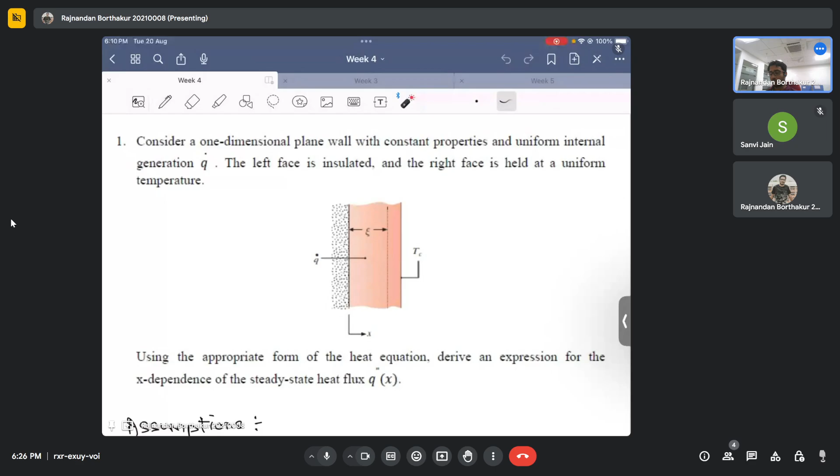In the first problem, we were asked about a body where one face was insulated and the other end had a prescribed temperature. There was uniform heat generation taking place inside the body, and we were asked to find the expression for the heat flux as a function of the spatial coordinate, keeping in mind it's a 1D heat transfer problem.

We solved that using the heat diffusion equation, and concluded by using the necessary boundary condition that our heat flux is proportional to x. This is indeed the case because when we have heat generation, as you derived in your lecture classes, the temperature profile is parabolic in nature, provided the heat transfer is one dimensional and heat generation is uniform throughout.

In that context, we saw that the temperature profile is parabolic, which means the flux, which is nothing but the gradient of temperature, has to be linear in x. So this is something that we saw.

In the second problem, this was a much more involved problem where we basically found out several things related to heat generation. The temperature profile was given to us, and we were asked to sketch the temperature profile, evaluate the heat generation rate, the fluxes, and finally, as homework, evaluate the heat transfer coefficient associated with these fluxes.

The important information that can be extracted from this problem is that although there was uniform heat generation taking place inside the slab, and the temperature profile was parabolic, we saw that due to the difference in the values of the heat transfer coefficient, which we didn't know a priori, the fluxes at these faces were not equal.

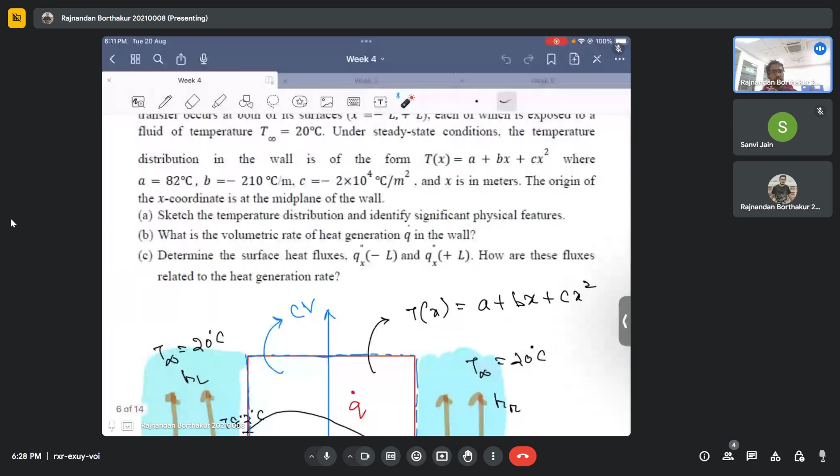This was contrary to a problem we solved in the first class, where if there is uniform heat generation inside a slab, and the ambient fluid had the same temperature and the same heat transfer coefficient, then the temperature profile was symmetric about the mean line at x equal to 0. However, in this case, since the fluxes at these faces were not equal, this means the rate of heat dissipation from the body to the fluid at the right face and at the left face won't be the same.

This is attributed to the fact that the heat transfer coefficient of these two faces are not the same. So this was basically the qualitative reason why the temperature profile is not symmetric.

However, as part of your homework, I asked you to evaluate the heat transfer coefficient. So can you kindly just give me a hint? How do we now evaluate this heat transfer coefficient, provided what did we know? We know that the fluxes from these faces we have evaluated. So can you tell me quickly how do we evaluate the heat transfer coefficient? Just a hint, it will be a good recapitulation also.

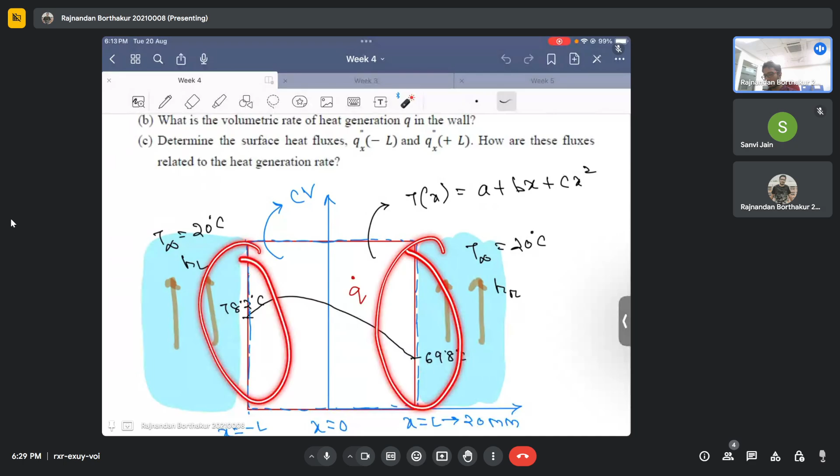What do we need to use in order to evaluate the heat transfer coefficient here for these faces? Yes, can you give me a hint? Or if you guys have evaluated it at your end, you can tell me the answer, or else I'll show you how we evaluate the heat transfer coefficient.

So basically, it's very simple. We need to use the continuity of fluxes at the interfaces, which I have repeatedly said. At the interfaces, whatever flux is coming from this slab to this interface should be dissipated to the surrounding fluid, which means I can write that at the right interface.

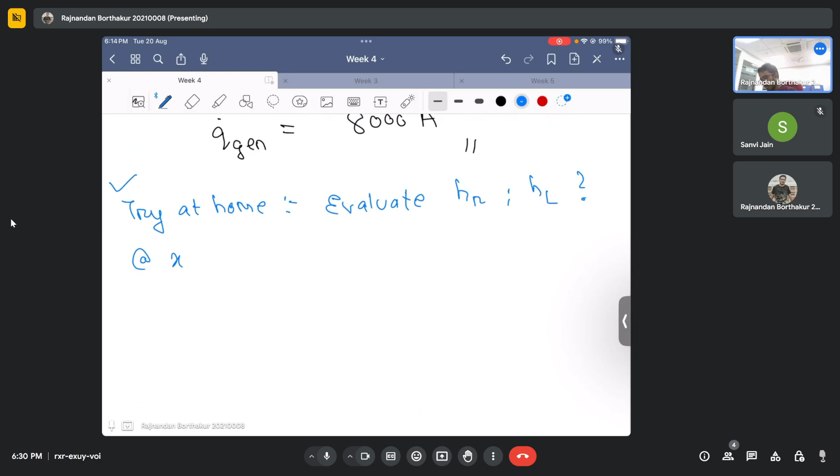So at x equal to L, what I can write is minus k of the slab times dT by dx at x equal to L is basically equal to what? Can you tell me what this is equal to? I hope this is not that tough, right?

We just need to balance fluxes. The flux coming out from the slab to the interface needs to be dissipated, because interfaces cannot store energy, at least in this context. So this should be equal to the convection flux, right?

So the convection flux would be the heat transfer coefficient towards the right times the temperature at x equal to L minus T infinity. Now everything is known to you, right? This flux we have already evaluated because we know the temperature gradient, so you can evaluate this flux.

In fact, we have evaluated that this flux at x equal to L is basically 5050. And T at x equal to L is also something we have evaluated in this problem.

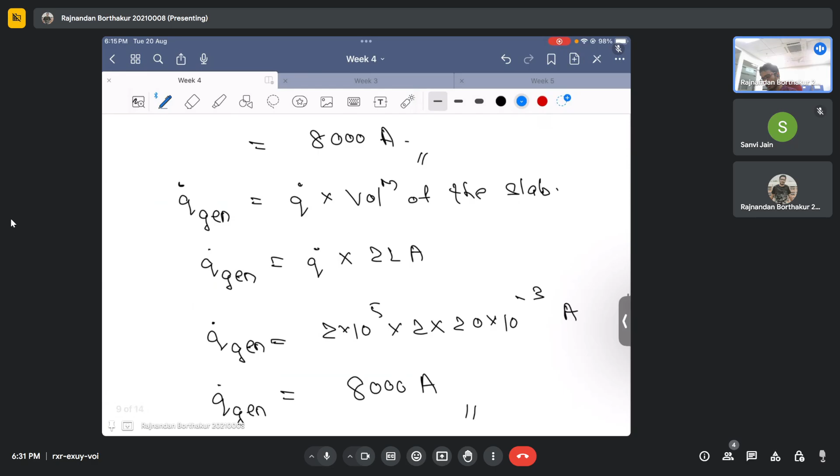So what was T at x equal to L? T at x equal to L is 69.8 degrees Celsius, minus T infinity which is 20 degrees Celsius. So this is basically minus 20.

Which means from here you can nicely evaluate the heat transfer coefficient h_R as just 5050 divided by 69.8 minus 20. Just do this math on your own and you will get the heat transfer coefficient having the unit watt per meter square Kelvin.

Similarly, using the same principle, exactly the same principle, you need to apply this for x equal to minus L.

When you write this for x equal to minus L, this becomes minus k dt by dx at x equal to minus L, which equals your heat transfer coefficient of the left times your temperature at x equal to minus L minus T infinity. If you follow the same principle as before, you can easily evaluate the heat transfer coefficient HL for the left face. Just do this math and you will get some value with units watt per meter square Kelvin.

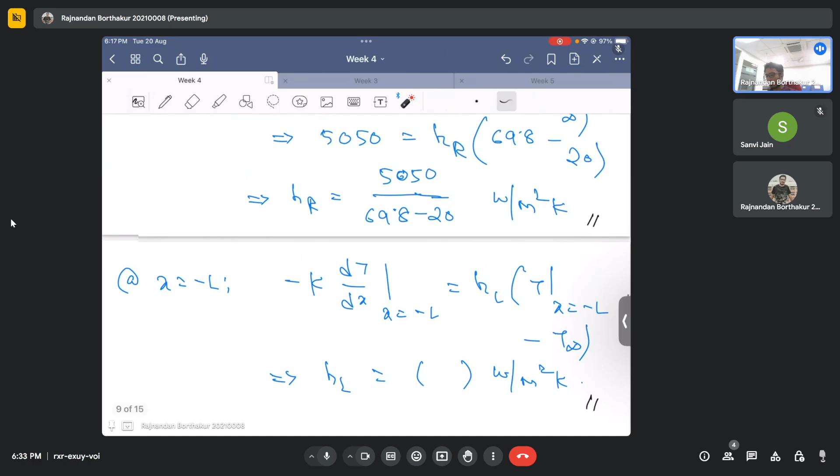This was something we saw, and I asked you to do this as part of your homework, or you can do it at your end at any time. I hope you have at least tried to do it, or have evaluated it. This will help and assist you in thinking how to solve such kinds of problems when you encounter them, and you should try to do it whenever you get a chance to solve this kind of problem.

We ended this problem by solving another important problem involving heat generation in a cylindrical pipe having an inner radius r1 and an outer radius r2, given that the cylinder is insulated at its outer radius. This was again related to heat generation, but this time in a cylindrical coordinate system. The idea was to solve the heat diffusion equation in cylindrical coordinates to get the temperature profile, and then use the boundary conditions to derive the constants C1 and C2. The first boundary condition was the insulation condition, meaning the flux at R equal to R2 is equal to zero, which is the physical manifestation of the cylinder being insulated at its surface.

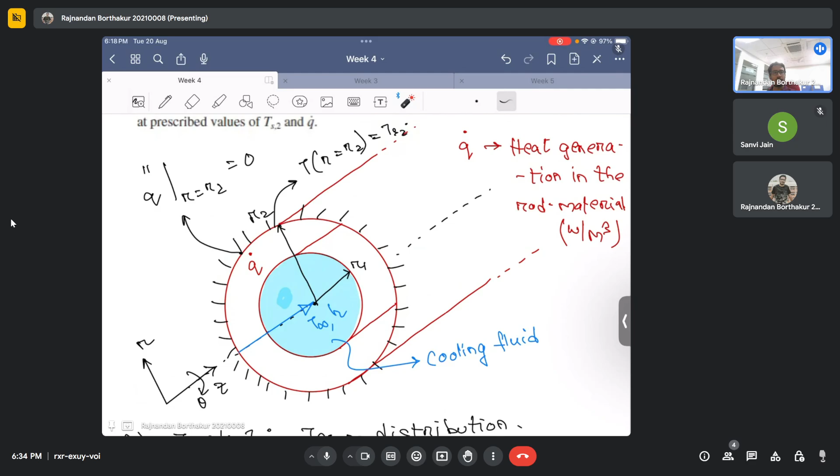To evaluate the second boundary condition, they said that this surface was at a prescribed temperature Ts2. From that we evaluated the unknown constants C1 and C2. Thereafter, they also asked us to find the heat removal rate.

For that, it is simple because the cylinder for which we are solving the heat diffusion equation is being convectively cooled by a fluid flowing through its annulus. They asked us, if the fluid is flowing through the annulus, what is the heat removal rate that the fluid is extracting from the cylinder. For that, it was very simple: we used Fourier's law and applied it at the surface R equal to R1, and this is precisely the heat removal rate from the cylinder.

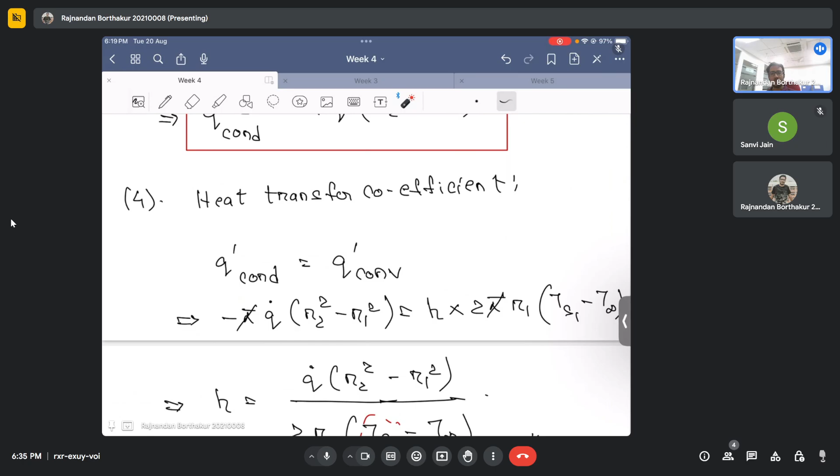We were then asked to evaluate the heat transfer coefficient, for which we did exactly what we did some time ago: we equated the conduction flux to the convection flux. This is something we did in the last week.

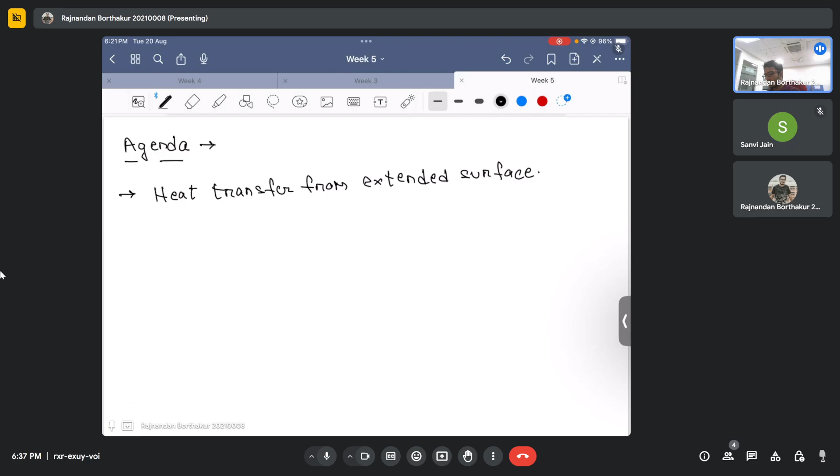That is basically understanding how heat transfer takes place from extended surfaces. So I'll begin, and I hope you guys will answer some of the questions. I'll start by asking a question here, and then proceed with what needs to be done.

I hope assignment 5, which is related to extended surfaces, has been released, and I hope you got a chance to watch the week 5 lectures, which are again related to extended surfaces. It starts off with understanding the heat diffusion equation that we write for an extended surface.

It starts with the fact that you take a long surface, a long fin, then derive what the temperature profile would look like. For instance, you solve the heat diffusion equation there.

You make a transformation, saying theta is basically T minus Tb, where Tb is the base temperature of the fin that you guys have seen. Then you solve an equation like this: d2theta by dx2 minus m square theta equals to 0. This is solved subject to the boundary conditions.

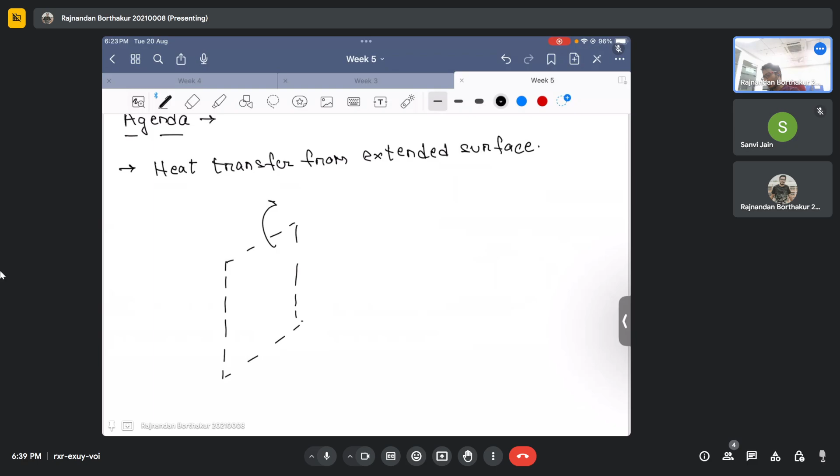Now for the boundary conditions: let's say when I'm taking a fin, this might be my base surface, and it's called the base surface because it remains at some temperature Tb. This is the surface from which we are trying to extract heat, such that the rate of heat transfer is enhanced.

Let's say we are attaching a fin here, and my fin is cylindrical in nature, so it becomes something like this. Then, this boundary condition on the left always remains the same.

We say that the temperature here - remember the theta transformation variable is nothing but the temperature of the fin at any axial location minus the base temperature Tb, because this surface is at a base temperature known as Tb. Theta is the temperature at any axial location of the fin minus the base temperature.

So remember, when you guys solve the governing equation, which looks something like d2theta by dx2 minus m square theta equals to 0 - can you tell me what was the value of m?

M was something related to the physical properties and the dimension of the fin. Can you remember what is m? Can you quickly try to remember and tell me?

Yes, exactly, you were right, Sanvi - it's p. Actually what you wrote is m square. M is basically the square root of ph by k times ac. So it is the square root of that. Thank you, Sanvi, for the answer.

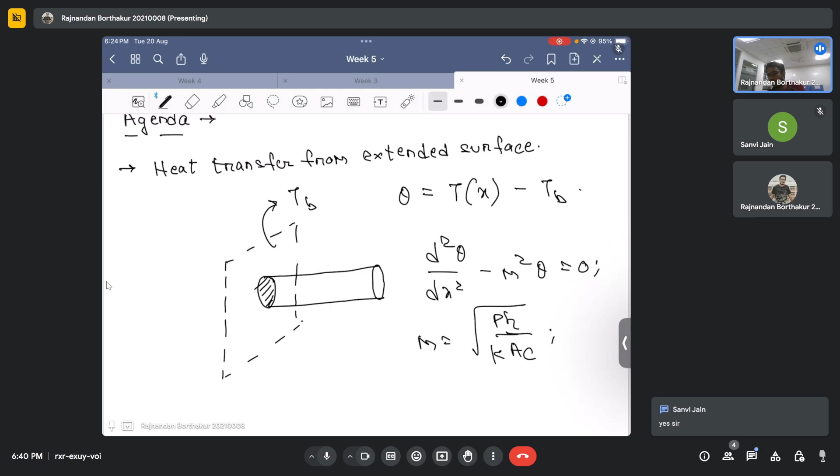So what I was saying is that in order to solve this equation - a second order equation - you require two boundary conditions, as you guys have seen. The left boundary condition always used to remain the same.

This is nothing but theta - can you tell me what was the left boundary condition, what is theta at x equal to 0, if you remember? This was just the base temperature, theta b, right? So theta at x equal to 0 is nothing but the base temperature, theta b.

The only difference that came into the picture was the boundary condition we used to write at the right surface. For instance, if I have a long fin - the very first case you solved was for a long fin, meaning the length of the fin is very long with respect to its cross section - in that context, we use different boundary conditions. The second case was the boundary condition known as the insulated tip boundary condition.

In the first case, we had a long fin, where the fin length was sufficiently long with respect to its dimension. In the second case, the insulated tip boundary condition, the length of the fin is not that long, but the tip is insulated, meaning the flux at x equal to L is equal to 0.

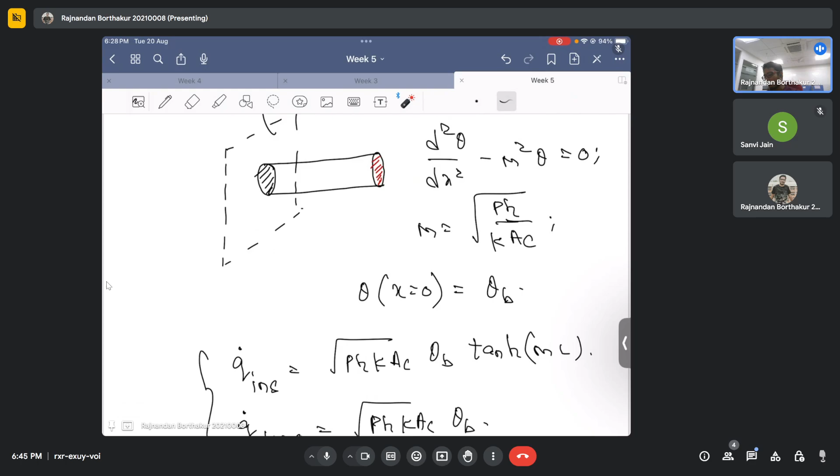The fourth boundary condition is that instead of being convectively cooled, they have prescribed the temperature here - on this surface the temperature is known. For instance, if my theta is basically theta B at the base, they have said that on this surface, let's say my theta is some theta R, which is known a priori.

Depending on this, the boundary conditions of the fin varied, and the expressions for the rate of heat transfer, fin effectiveness, and fin efficiency also varied. But the bottom line is that irrespective of whatever boundary condition you use, we just need to solve the heat diffusion equation - this equation is universal and valid at each and every point of the fin; it's just the boundary condition that differs. Quickly, I would like to reiterate two more things and then we will start solving problems.

Can you now tell me, based on this, we define two important fin characteristics. One is known as fin effectiveness. Can you quickly tell me what is fin effectiveness? This is a direct question from your assignment - you were asked to answer what is fin effectiveness.

Try to understand why do we basically define effectiveness. When we define effectiveness, we are kind of defining it with respect to a scenario when that particular thing is not there - that's the hint to the answer of fin effectiveness. So now can you tell me what is fin effectiveness?

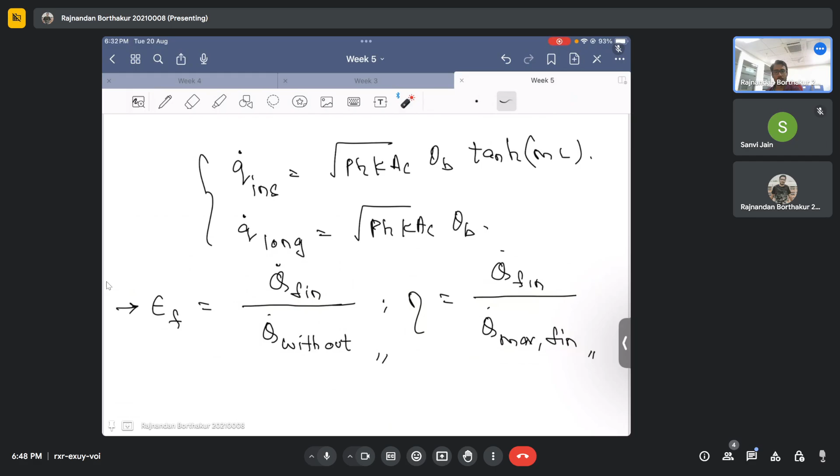Okay, now try to understand that not always will adding a fin enhance the heat transfer. For instance, consider a scenario when there was no fin. If there was no fin, this entire surface would have just convectively released the heat to its surrounding.

Now what we are trying to do is add an additional material. This material is very thin, so the perimeter to surface area ratio is very high, such that this material would enhance the rate of heat transfer, but the bottom line is that this material would also add additional conduction resistance to its path.

So it's not that readily you just stick a material and that would just increase your rate of heat transfer, because while this material is trying to release the heat to its surrounding, it itself will pose a conduction resistance to its path.

So the objective is that we try to minimize this additional conduction resistance of the fin such that this material will enhance the rate of heat transfer with respect to the case when this fin was not present.

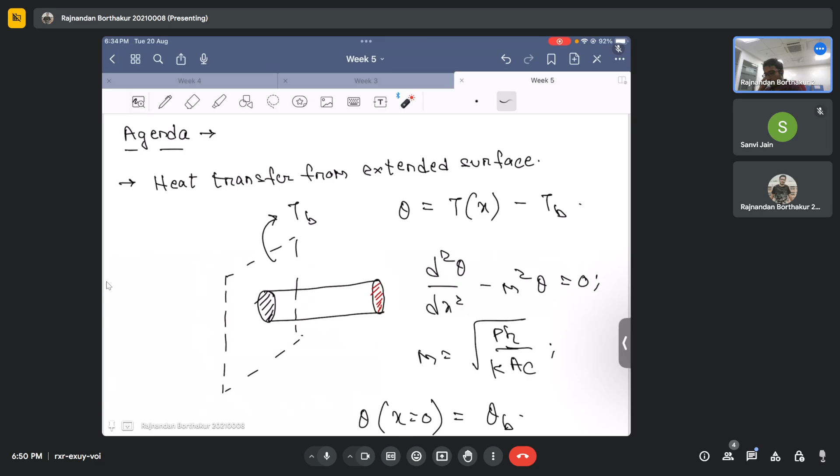Okay, so based on these theories that we see, we will solve our first problem. It's not this problem, so this is our first problem that we'll solve. The earlier problem will come at a later stage.

So it says that establish a relationship between fin effectiveness and fin efficiency. Okay, and while doing so, we will look into some important conclusions that I have just said.

So for instance, as you have correctly pointed out, that your fin effectiveness is basically rate of heat transfer with fin to the rate of heat transfer without fin.

Now you need to tell me that if I now have a base surface, and this base surface has got an area AB, which is basically the area of the base surface, okay, I'll for the time being just neglect this AB. I mean, we'll see this, but for the time being, just make it clear. Just one second.

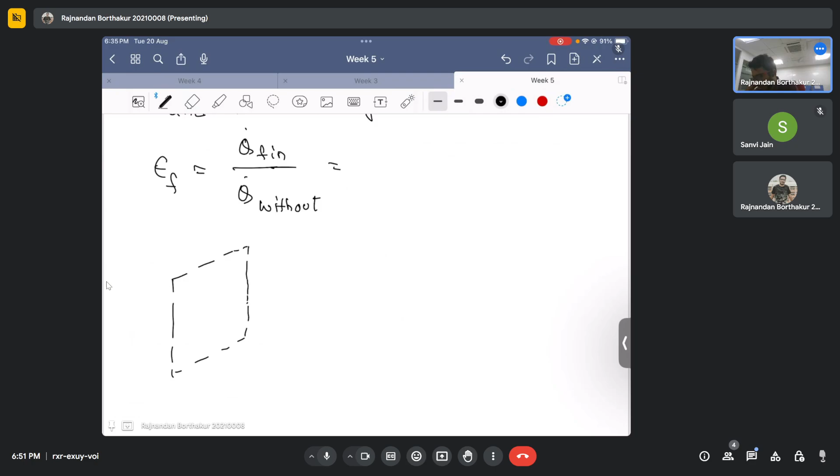Now let's say we have a base surface, basically this. This surface is known as the base surface, and it has an area AB, which means this entire surface has an area AB. Let's consider the area of the base surface to be AB.

In this context, if I now attach a fin, and for the time being let's say it's a long fin to simplify our calculation, this is the fin. The cross-sectional area of this fin we'll denote as AC, so AC is the cross-sectional area of the fin.

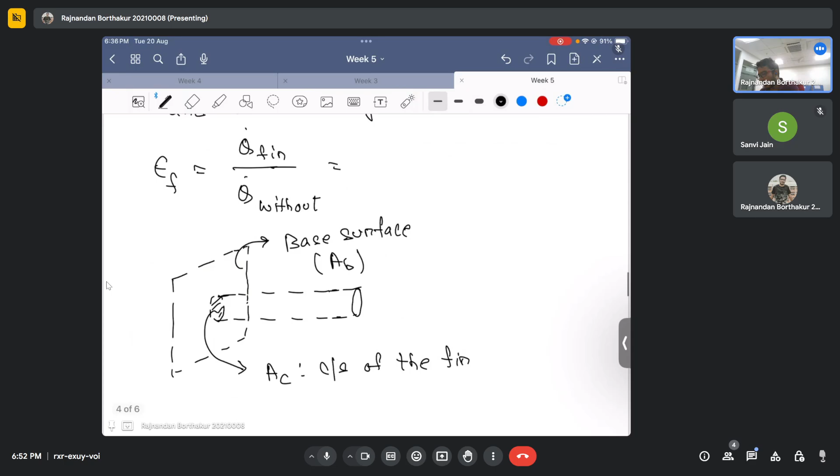In this context, can you tell me what will be Q dot without, the rate of heat transfer that will take place from this surface if there was no fin? I'll give you one more information: the heat transfer coefficient is H, and this base temperature we'll consider as theta B. Can you tell me, based on this, what is the rate of heat transfer without fin, in terms of H, theta B, and this area?

So the objective is to relate the fin effectiveness and fin efficiency and see how these two relate, we'll try to establish a relationship between the fin effectiveness and fin efficiency. So can you now tell me what will be the rate of heat transfer without fin?

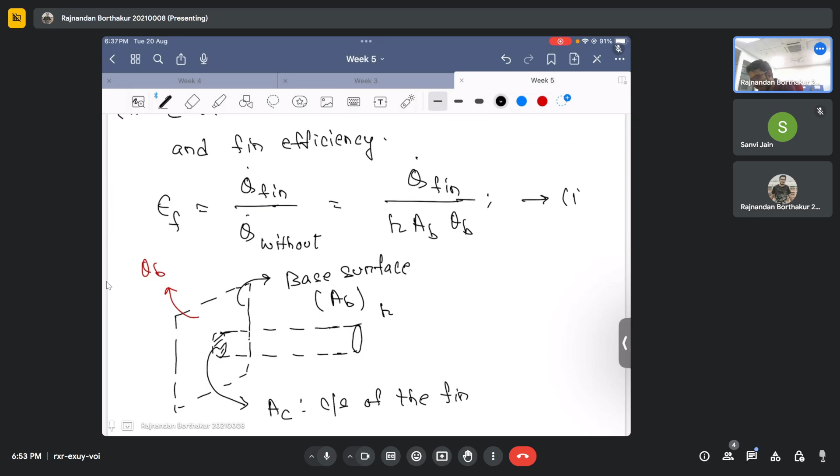We have H A B delta T, where delta T means theta B, that's what I think you meant. Exactly. So the rate of heat transfer without fin, as you rightly pointed out, is the heat transfer coefficient, that is basically Newton's law of cooling, as we have seen multiple times. So it's H times area of the base times theta B, where theta B is basically the base temperature, which we'll denote as theta base. So this is something we get from the definition of fin effectiveness.

Now, can you tell me what is the efficiency? Efficiency is nothing but the rate of heat transfer from the fin to the maximum rate of heat transfer from the fin. Here is my question: we will keep the numerator as it is, it's just going to be q dot fin. That's because we have q dot fin here also and here also, so we will not substitute the value there because it will just cancel out, or when establishing a relation, this factor won't be there since it appears in two forms.

But now can you tell me in what condition the fin would dissipate its maximum heat? Can you tell me the condition under which there will be maximum rate of heat transfer from the fin? Can you think of it?

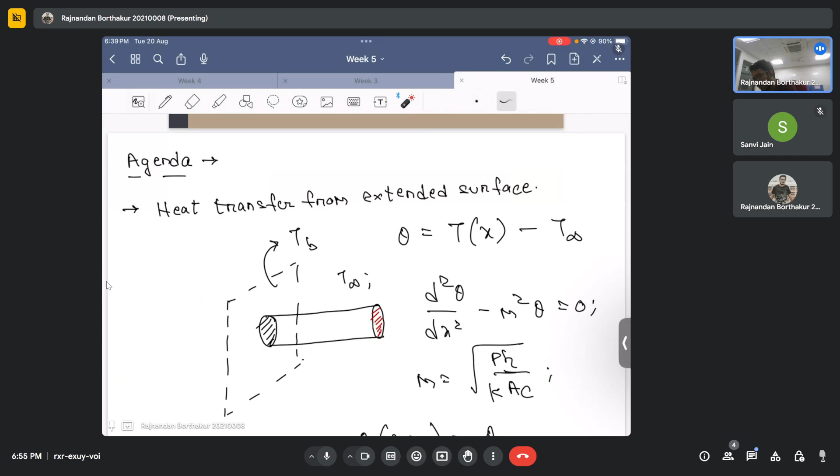You correctly pointed out that the rate of heat transfer without the fin is H AB theta B, the heat transfer coefficient times the area of the base multiplied by the temperature difference of the base and the ambient. This theta B is going to be TB minus T infinity. By the way, I made a slight mistake here, from my end. Theta was not this thing; theta was basically the temperature of the fin at any point minus the ambient temperature. I wrongly wrote it as theta B, this will be T infinity. Sorry for that. But anyways, can you now tell me under what condition the fin would dissipate maximum heat?

Can you tell me? Can you give it a try?

So what Sanvi says is that at x equal to 0, temperature equals theta b. That is true, Sanvi, that at x equal to 0 the fin temperature would be theta b. But my question is, that is for a practical fin. For a practical fin, the temperature here would be theta b, and when you move in this direction, the temperature would ideally decrease. But in an ideal scenario, for the fin to dissipate its maximum heat, the entire fin has to be at the base temperature. What I mean is that when you move from here to here, if my fin temperature is equal to the base temperature, in that scenario your fin can dissipate the maximum heat. And this is kind of a limit.

Just like the Carnot cycle's Carnot efficiency is a limit, this Qmax maximum is a limit to the maximum heat transfer that the fin can dissipate. So I'll write it here. So Qmax is basically the maximum heat the fin can dissipate.

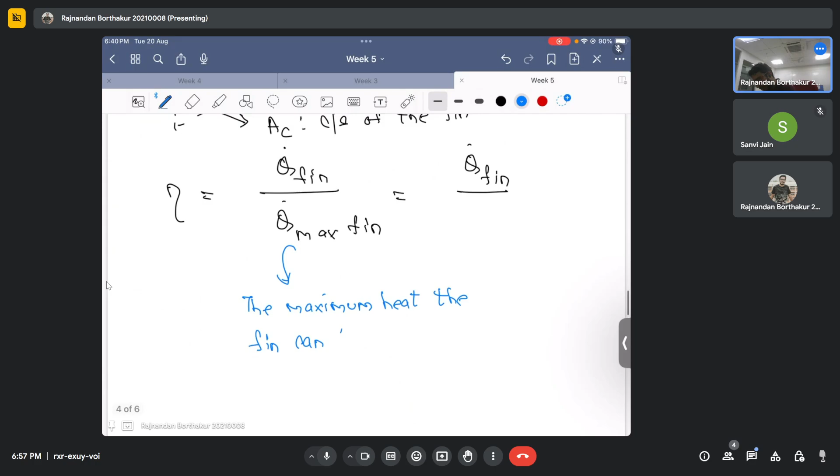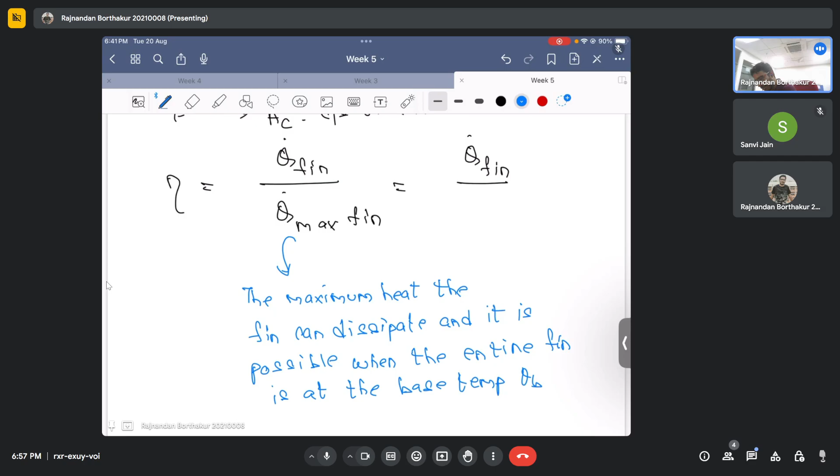And it is possible when the entire fin is at the base temperature theta b, meaning that I hope you have understood this.

This means that whether I am in this cross section or in this cross section or in this cross section, throughout this entire cross section the fin temperature is just the same and it is equal to the base temperature. The physical insight or meaning of this fact is that the conduction resistance within the fin is negligible. In that context, the entire surface of the fin would be equal to the base temperature theta b, and the only way the fin would dissipate heat is now by convection to its ambient.

For example, if I am in this cross section, my temperature would always be equal to theta b, and this would basically dissipate heat now to its ambient, and the mode of heat transfer is convection. In this scenario, the fin can dissipate the maximum heat. Is it so? Are you clear now? In what scenario can the fin dissipate maximum heat, and thus the definition of fin efficiency?

Can you give it with a yes or a no? Or do I need to explain it again? I mean, I'll be happy to do that. So, did you understand the scenario? When can the fin dissipate the maximum heat from its body? Okay, yeah, sure. Thank you very much.

Which means now, can you tell me what will be this expression of Qmax fin? So I have said the scenario when Qmax fin can occur, that is when the entire fin is at the base temperature. Now what will be this Qmax fin? So that also I have hinted.

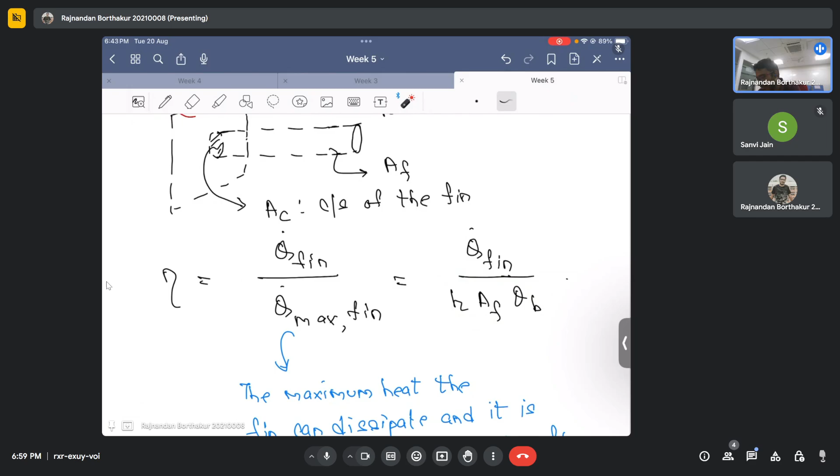That is obvious, right? Because the only way the fin can dissipate it to its ambient is by convection, since the entire fin has now got the same base temperature, which means by conduction it won't dissipate heat. We have now considered that there is very negligible conduction resistance, which means the only way this heat could go out from the fin is by convection to its ambient.

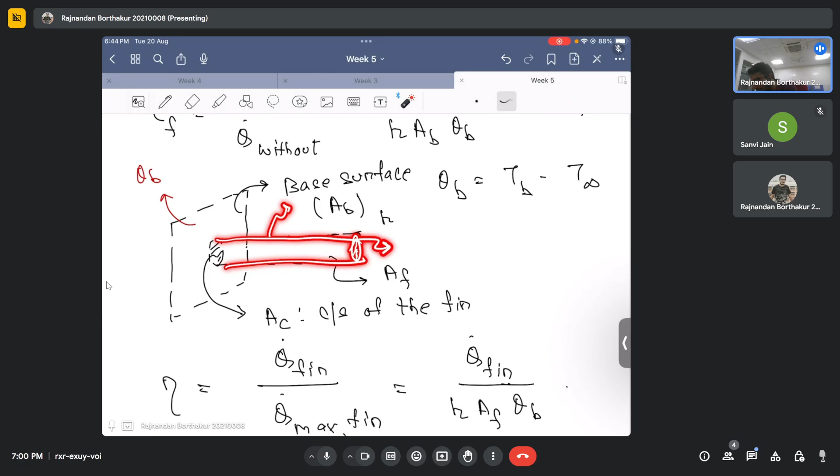And what is the heat transfer that takes place due to convection? It is the heat transfer coefficient times the area. Now the area becomes critical, because you need to consider the area of the fin. The area of the fin will encompass this surface area plus this cross sectional area, because these are the areas through which it will dissipate heat to the surrounding. That's why I have written it as AF. You can pinpointedly calculate AF depending on the geometry of the fin.

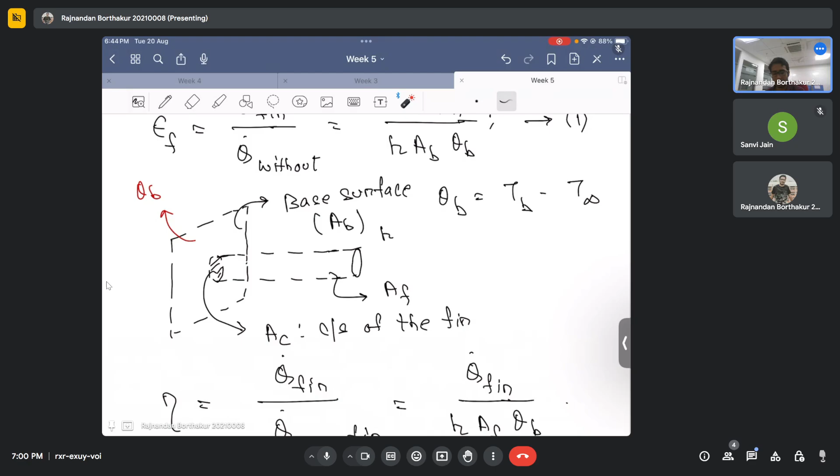And of course this is theta b, because I have now said that the entire surface of the fin is at the base temperature, which means that the temperature difference the fin would see when it dissipates heat through convection is Tb minus T infinity, and that's why we have written it as theta b, which is basically what I was talking about. So this is the definition of your fin efficiency.

These two parameters are very important, and frequently you will see the usefulness of these two parameters. Now the idea is to essentially relate this fin effectiveness and fin efficiency, and what we will now do is try to calculate, from the definition of efficiency, q dot fin. So q dot fin becomes, so from equation 2...

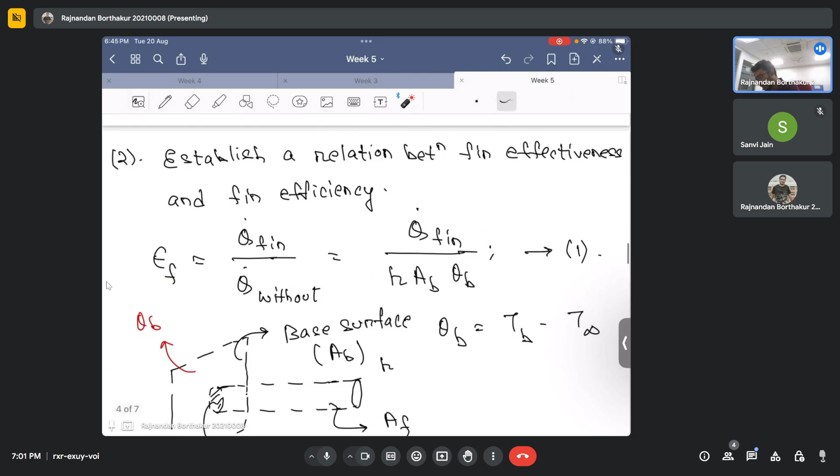So from equation 2, your q dot fin becomes the efficiency multiplied by Qmax, and this Qmax from the fin we have calculated as h times area of the fin times theta b. And what we will now do is substitute this q dot fin into this definition of effectiveness, because we have q dot fin here.

Okay, so I hope the drill is clear. So what we will do is we'll substitute this, substitute in 1. So what was 1? Our 1 was fin effectiveness was q dot fin, divided by the rate of heat transfer when there was no fin, which basically was h a b theta b.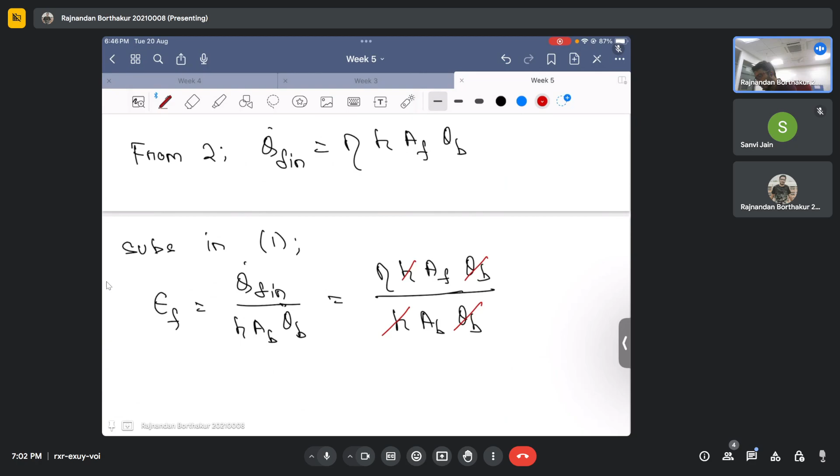And now we will substitute the value of q dot fin from the definition of effectiveness, which becomes efficiency times h a f theta b by h a b theta b. Some parameters would cancel out, your theta b and theta b would cancel out, h and h would cancel out. And then your effectiveness becomes basically your efficiency into area of the fin by area of the base. This is typically the relationship between your fin effectiveness and fin efficiency. I hope you are clear with this one.

Okay. All right. This is what the question has asked us to do. We'll do one more thing, that we will derive the condition under which the use of fin is essential. And for that we will use the definition of fin effectiveness.

So remember, what we said is that your fin effectiveness is basically q dot fin by HAB theta b.

Actually, I think I made a mistake here. Can you tell me where did I make a mistake in effectiveness? So I made a mistake in effectiveness. Can you tell me where did I make a mistake here? I made a mistake here in defining something. Can you suggest where did I make a mistake? So I'll tell you, I made a mistake in effectiveness. There is something that is wrong in effectiveness.

See, when we were defining effectiveness, I said that it is the rate of heat transfer from the fin to the rate of heat transfer without fin. And then when I wrote q dot without fin, I wrote this area as AB. But this is wrong, right? Because the fin is responsible only for dissipating heat through this area. The rest it will anyway dissipate to its surrounding. Which means instead of this being AB, it should be AC. Are you clear why it is AC and not AB?

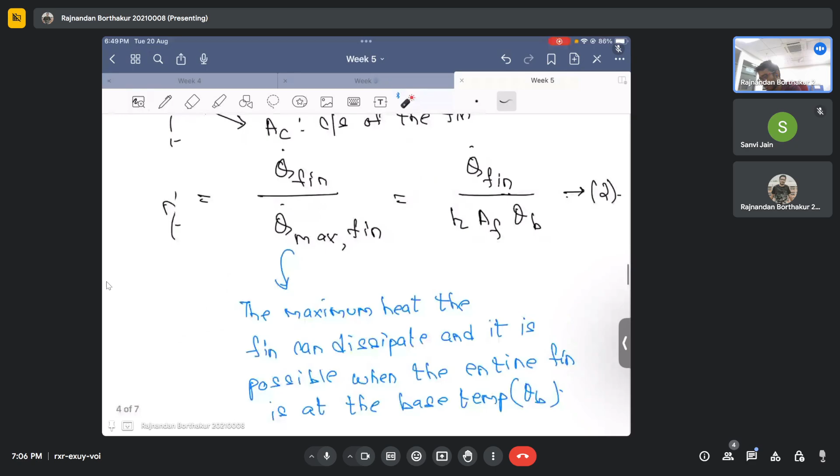Anyways, so this would be AB - sorry, this would be AC, and then this would be AC. So this was the mistake I was making. So your effectiveness is essentially efficiency times the area of the fin to the cross-sectional area, AC. And of course this has to be also AC.

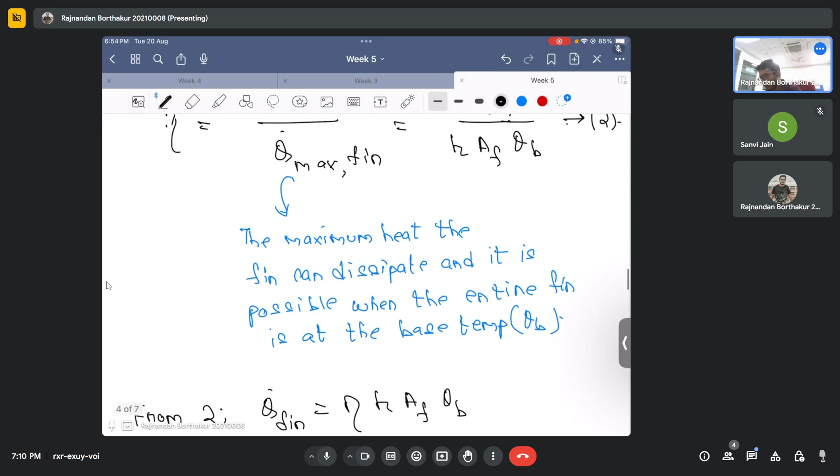I ask you again, I hope you have understood why you have used AC and not AB. Are you clear on this? Can you kindly give it a yes or a no? Because I was making a mistake, right? So did you understand why this is AC and not AB? Because AC, what is AC?

It's basically this cross section, okay, where the fin is attached, and AB is the area of the entire base surface. I'll repeat it again: it's not AB. That is typically because we are trying to compare the rate of heat transfer from an area when there was that fin with respect to the same area when there was no fin. So the area always needs to be the same. If we are using AC in trying to calculate the rate of heat transfer from the fin, then we should use the same AC in trying to calculate the rate of heat transfer when there was no fin. And that is typically the reason why this area is AC and not AB.

The remaining area, what is the remaining area? If AC is already accounted, the remaining area is the base area minus AC. This remaining area will anyway dissipate heat to its surrounding by convection, so we cannot count that area into the picture. We always need to count that particular area on which we are attaching the fin.

In the second scenario, we are removing the fin and then trying to calculate the rate of heat transfer from that area. Are you clear on this now? Can you give it a yes or a no? Yes. Thank you.

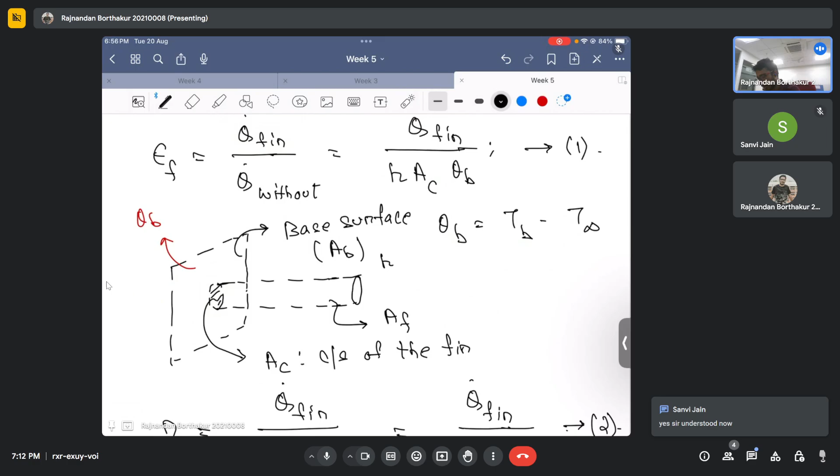Okay, so this was the first question that we solved. It was rather an easy question, but it was very insightful. And you will see multiple assignment questions related to the exercise that we did now.

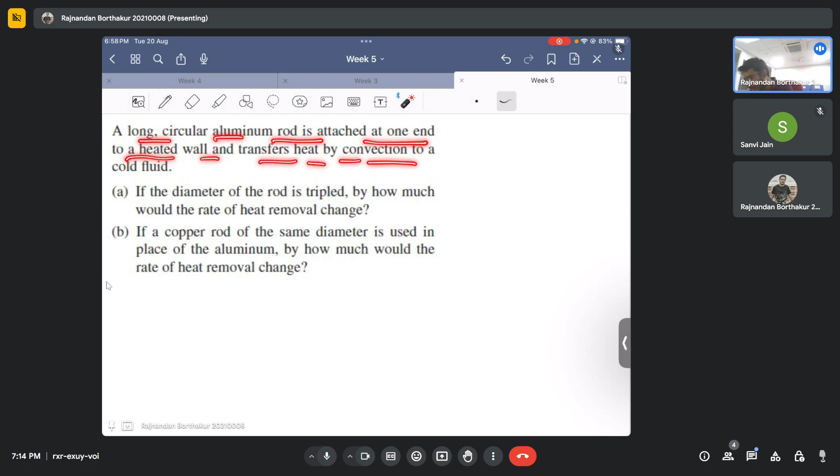It says that a long circular aluminum rod is attached at one end to a heated wall and transfers heat by convection to a cold fluid. This hints that the aluminum rod serves as a fin. Now, if the diameter of the rod is tripled, by how much would the rate of heat removal change? And in the second case, if a copper rod of the same diameter is used in place of aluminum, by how much would the rate of heat removal change?

Okay, so the question seems, from the question it seems that we have to use the concept of fins.

From the question, can you tell me which of the four boundary conditions that we first saw, and that you saw in this week's lecture series as well - the long tip, the insulated tip boundary condition, the convection or prescribed convection from the tip, and the prescribed temperature - out of these four, which one should be used to solve this problem?

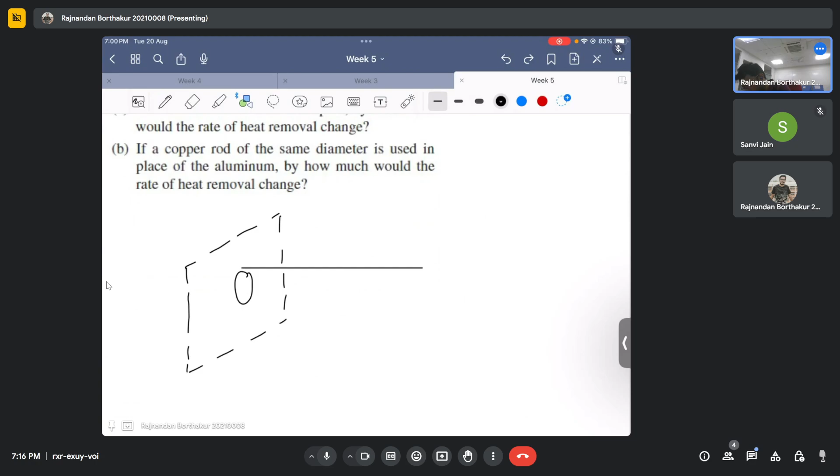First of all, you need to appreciate that this is a fin problem, because it says an aluminum rod is attached at one end to a heated wall, which means it's kind of like this: there is this heated wall, and then you are attaching an aluminum rod of some prescribed diameter.

And then this wall is heated. This means that the rod is now trying to increase the rate of heat transfer, and that's why it serves the purpose of a fin.

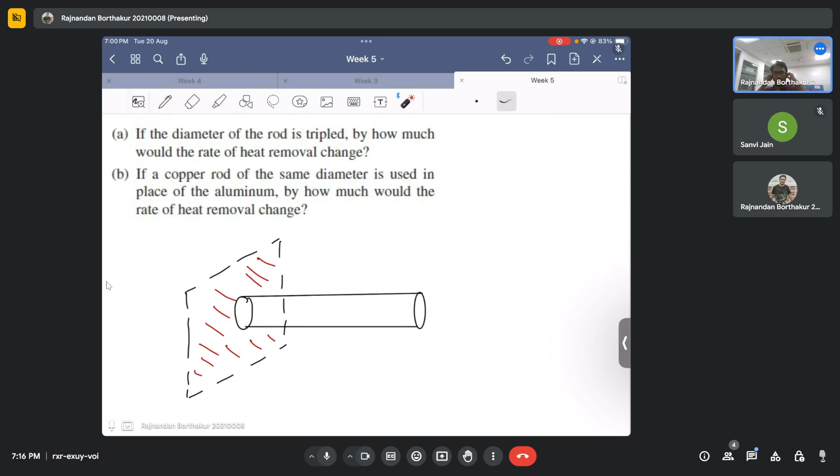The question is, if this is the case, and it says that it transfers heat by convection to a cold fluid - that is, it has a cold fluid here, which may be at temperature T infinity and a heat transfer coefficient H infinity, and it says that it is transferring heat to this cold fluid by convection - under this case, which boundary condition should we use?

We need to determine what is the rate of heat transfer, and the rate of heat transfer depends on the right boundary conditions that we use. For instance, for a long fin, the expression for rate of heat transfer is different. For the insulated tip boundary condition, the expression is of course different.

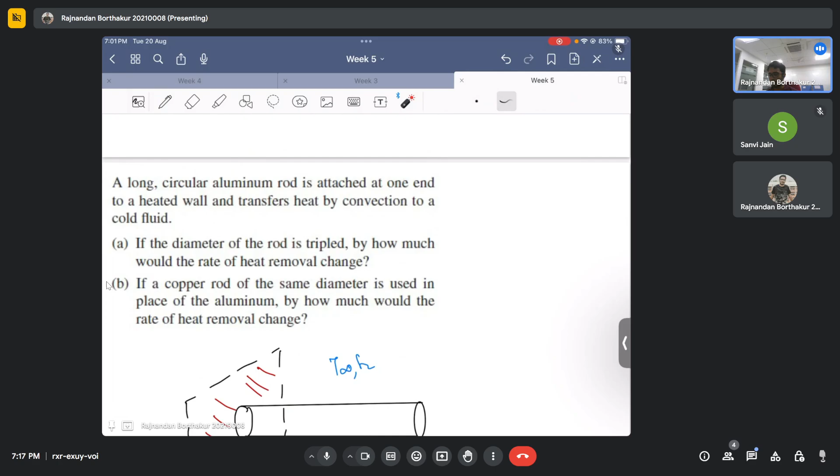So which boundary condition do you think we should use in this problem? Is it an insulated tip, or a long fin, or is it convectively cooled, that is, prescribed convection from the tip, or a prescribed temperature at the tip? Which one do you think we should use here? You should read the question for that. What do you think?

It's already given that a long circular aluminum rod is attached at one end to a heated wall. This means, from the problem itself, that the length of the rod is very much long, which means it will be okay for us to use the long fin assumption. I hope you are clear.

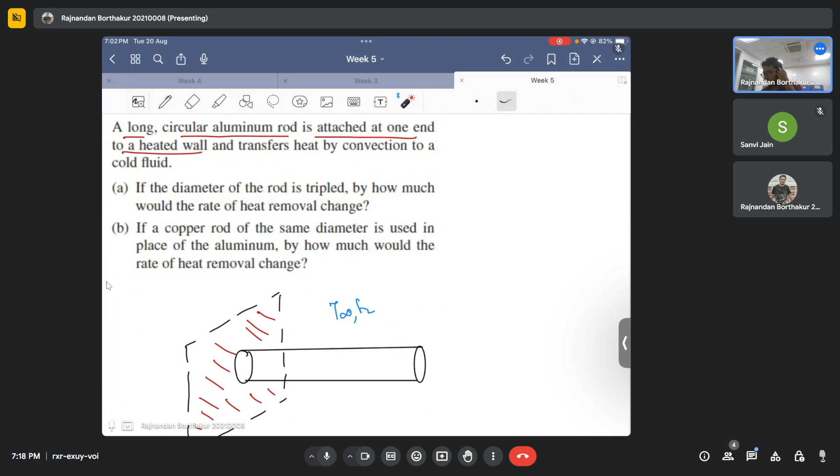So it just comes from the question only. The question says that the rod is long enough, which means that we can now use the long fin assumptions. In that context, the idea is using the long fin formulation.

Can you tell me what is the rate of heat transfer now, Q dot from the fin? See, because what they are asking us to compare is, if the diameter is tripled, how much would the rate of heat removal change? So for that, at least we must first calculate what is the rate of heat transfer, and then we will see how it depends on the diameter.

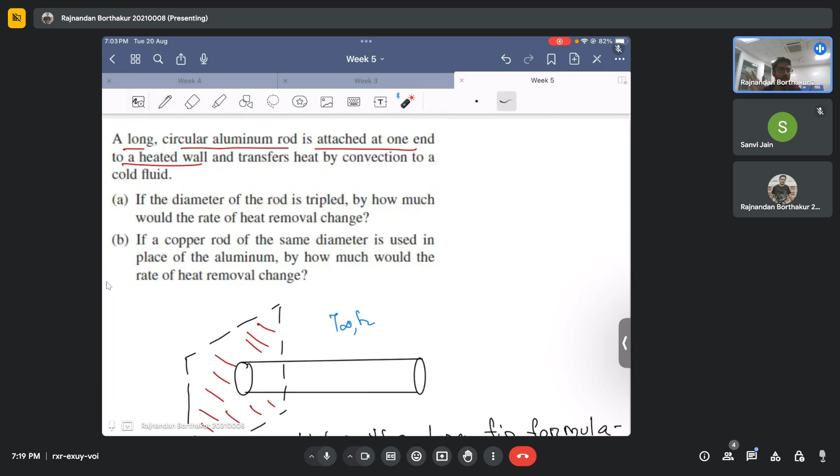Can you tell me, for a long fin, what is the rate of heat transfer? We just now saw it in the previous problem. What is Q dot F for a long fin? The long fin is the easiest one, right? It's not that difficult.

So Q dot F for a long fin, as we have seen, is nothing but under root of P H K AC theta B.

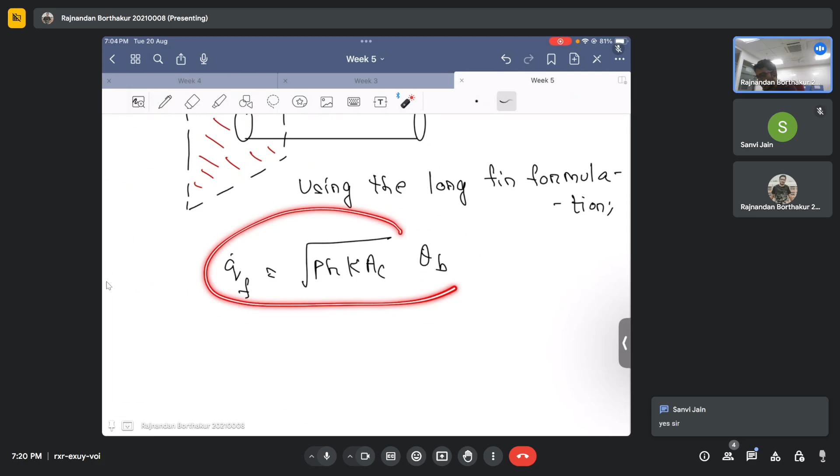Basically it's very simple. What you need to do is solve this for theta, using the boundary condition for a long fin, and you will get theta as a function of x. Now, in order to determine the rate of heat transfer, you just need to apply Fourier's law at this point.

Q dot is nothing but minus K times d theta by dx into AC. So once you calculate theta, just substitute it here, and you will get this expression - the idea behind getting under root of PHKAC theta B. I hope you have derived that, or at least gone through the steps involved in its derivation.

But on a broader perspective, that's the idea of how this is derived. Now let's see in which of these terms the effect of diameter is seen. So I can write it as Q dot fin - what would be the perimeter? Can you tell me what is the perimeter of this fin?

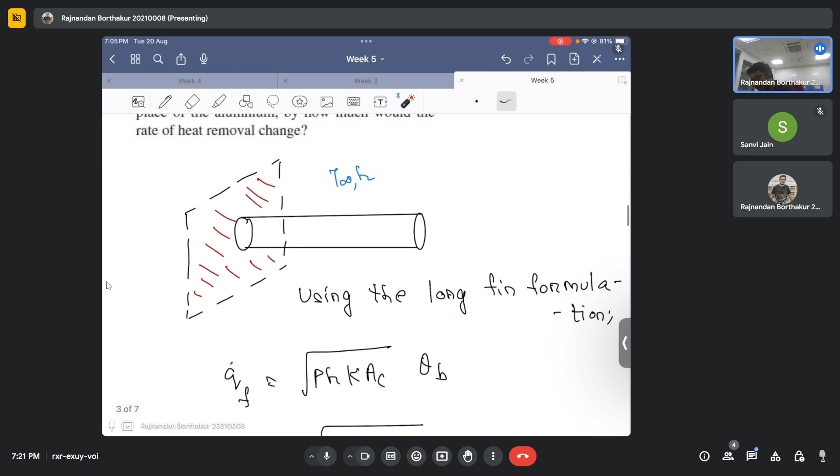The heat transfer coefficient won't be a problem because it does not contain diameter. The perimeter contains diameter, right? Because if I write the perimeter, it's pi times d, exactly right. So your perimeter is basically pi times d.

Thermal conductivity is not dependent on diameter, so this would be just K and AC. AC is, as you say the perimeter is pi times d, and your AC would be pi by 4 times d square, right? And then this would be just theta b, which means I can now write it as what?

I can now write it as Q dot F. If I just simplify, it's pi by 4. What I can do is, there is this pi and this pi, it will be pi square. So I'll take this pi square out of the square root, for which it becomes pi, and 4 would become 2, so it's pi by 2. This I will keep as h times k.

And then this would be d to the power - there is this d square and this one d, so this is d cube that is basically taking place here, and when it comes out of the square root, it would be d to the power 3 by 2. Please correct me if I'm making a mistake in the algebra, but I hope it is fine. And then this would be theta b.

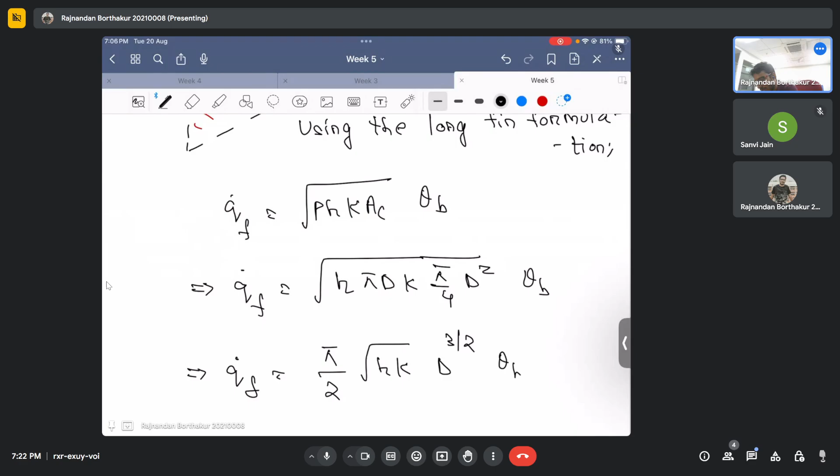Okay, so this is correct, right? So this means that for this circular fin, your rate of heat transfer, considering the fact that we are using the long fin formula, boils down to the fact that your q dot f is pi by 2 times square root of hk into d to the power 3 by 2 into theta b, which means that your rate of heat transfer for a circular fin, considering the long fin assumption, is proportional to d to the power 3 by 2.

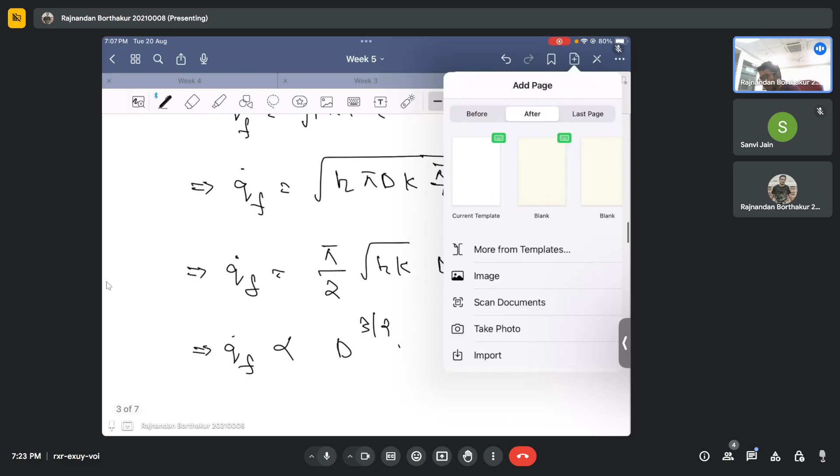Okay, so now we will look into this. Now what we'll basically do is see what happens if the diameter gets tripled. So they're asking us to compare the rate of heat transfer if d increases from d to 3d.

And for that, let's say I know the dependence now, so it becomes easier because I know that my rate of heat transfer is proportional to d to the power 1.5. So let's say my rate of heat transfer in the first case when the diameter was d, I'll write it as qdf, and in the second case, my rate of heat transfer if my diameter becomes 3d, I'll write it as q3df. And then this would be equal to what?

In the first case it would be d, and in the second case it would be 3d, and then it would be to the power 3 by 2. So I'll put it like this, and this d and this d would basically cancel. And this would basically become what? This would become qd, I'll write the larger one in the numerator and the smaller one in the denominator, and this would basically become 3 power 3 by 2.

So 3 power 3 by 2, or this can be written as 3 power 1.5, and if you evaluate this in your calculator, this will roughly come out to be around 5.2. This means that if your diameter increases from d to 3d, your rate of heat transfer, q dot 3df, is basically equal to 5.2 times your rate of heat transfer when your diameter was just d. This is basically the answer.

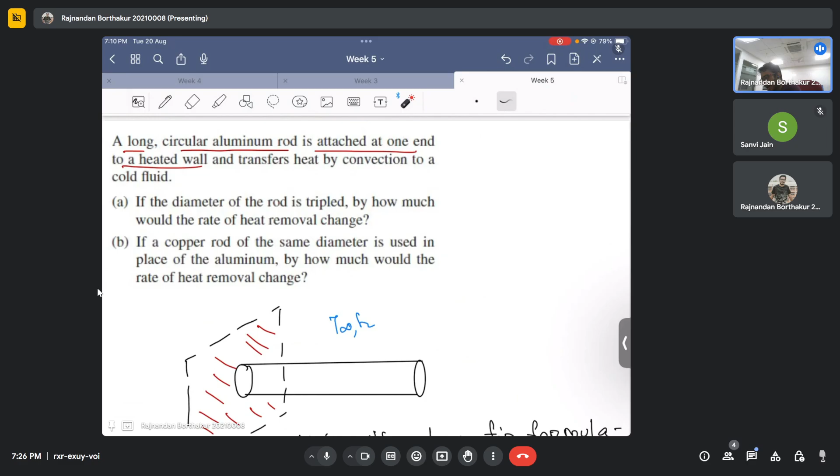So now, can you tell me what will be the answer for the second part? We already evaluated this. The second part says that if now a copper rod of the same diameter is used in place of an aluminum rod, by how much would the rate of heat removal change? So now can you tell me what dependence the rate of heat transfer shows?

So first of all, what will change if I transition from an aluminum rod to a copper rod? Can you tell me in this expression what will basically change if I transition from an aluminum rod to a copper rod? Which term would change? Copper rod has, yeah, exactly. You have pointed it correctly. This means what you are saying is that the thermal conductivity will change.

All other terms, for instance the heat transfer coefficient, this diameter, this theta b, would exactly be the same. And yes, you have correctly pointed out that copper has a greater thermal conductivity than aluminum. I think that is what you said, right? Yes, copper has a greater thermal conductivity.

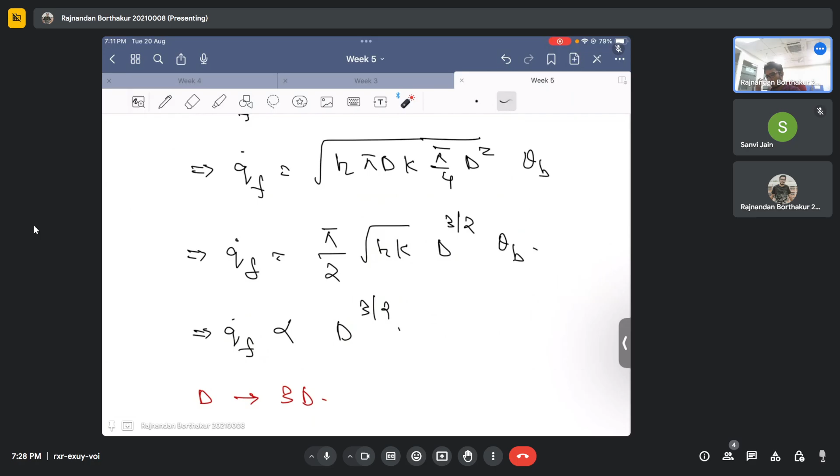Yes, exactly. Now this means, can you tell me what is the dependence on this Q dot F? Just like Q dot F is proportional to the 3 by 2 power of its diameter, what is this proportionality if we are considering K? It is half, right? So Q dot F is proportional to K to the power half, for the same diameter, because all other things are just the same. I hope you are clear on this.

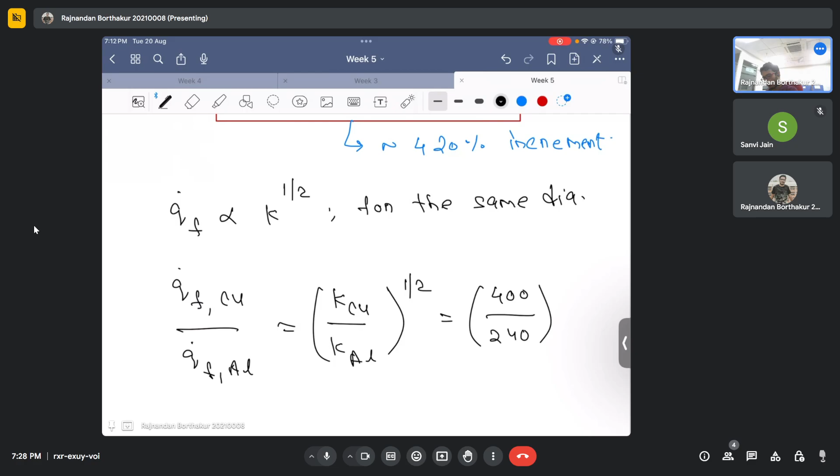This means if I now want to write it for copper, Q dot F copper by Q dot F aluminium becomes K of copper by K of aluminium to the power half. Can you tell me, the thermal conductivity of copper is roughly around 400 watt per meter Kelvin, while the thermal conductivity of aluminium is roughly around 240 watt per meter Kelvin. So this becomes 400 by 240 to the power half, and if you calculate this, it will be around 1.29, which means the rate of heat transfer for copper is 1.29 times the rate of heat transfer in case of aluminium, provided I have the same diameter.

And then if you want to calculate the percentage increment, this would be roughly around 29%. So this means if you are using a copper rod in place of an aluminum rod, for the same diameter, you will get your heat increment to be 29%. But keep in mind that you are doing this exercise for a circular fin, using the fact that you are considering the length of the fin to be long enough. In that context only, this expression we wrote here is valid.

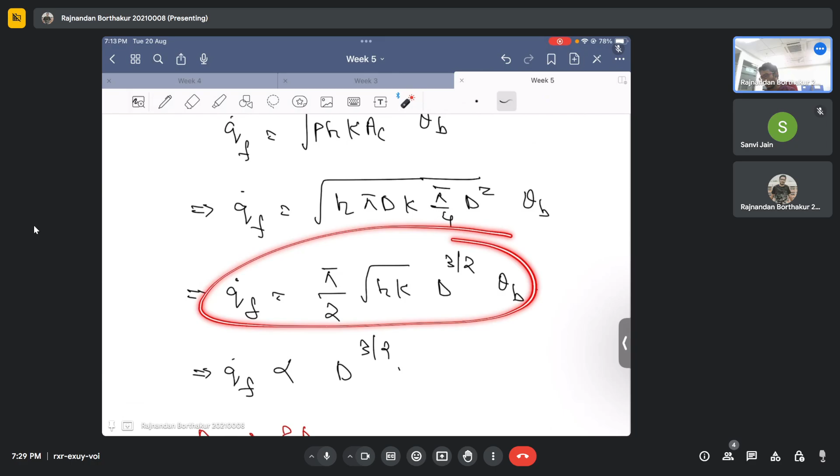But still, I'll ask you a question here. This is of practical significance. In most fin applications, for instance if you see a bike engine or a car engine, the fin is basically made of aluminum and not copper. Can you tell me why is that, despite the fact that copper has a higher thermal conductivity than aluminum? Why is that the scenario?

So generally, if you see the fins in an automobile, it is generally made of aluminum and not copper. Yes, exactly, that's lightweight. You have correctly pointed out lightweight, cheap.

I don't know what is the cost-wise difference between aluminum and copper, but yes, aluminum is lightweight. And one more advantage, I think aluminum is more cheap than copper. Copper is expensive, right? Aluminum wire is much cheaper than copper wire. So cheap is also one thing, and the most important factor apart from being cheap is the lightweight. Aluminum possesses ease of machining compared to copper because of being lightweight and cheap, and that's why even though copper has a greater thermal conductivity, maybe twice that of aluminum, we still prefer to use aluminum fins instead of copper fins.

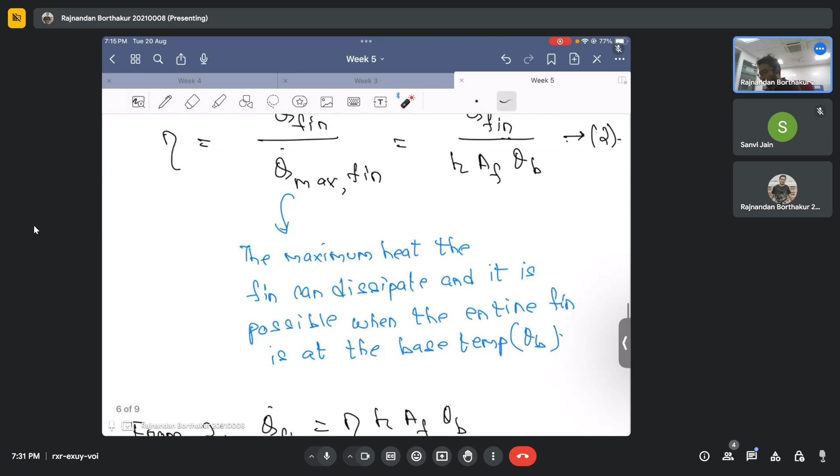I think we have some time left, so we will begin. I'll not solve the numerical since this might be new to you, but I will give you a hint. Did you learn something known as overall surface efficiency in your lecture series? Did you see this term? If not, I will give you a flavor of how these things work. I was planning to solve a numerical associated with this, maybe if you get time we will do it in the next class. But at least for today, I will give you an idea of what we mean by overall surface efficiency.

Okay, because this is of great practical importance. So all other problems on the fins, that is the problem that you have in your assignment and the theory problem, you are now in a good position of solving them. You can just go through it and you can easily solve them now.

However, I wish to give you additional information on something known as overall surface efficiency. Did you learn about this in the theory classes? If so, I will not spend time explaining what exactly it is. So did you see this? Can you just give it with a yes or a no?

It's okay, I hope it's okay. We will just go through it once again. It's not that it's not okay. So if, in case, no sir, I have not attended, that's okay, yeah, that's fine, that is completely fine. I think this topic was not covered in the lecture classes, but it's okay, that's not a big deal.

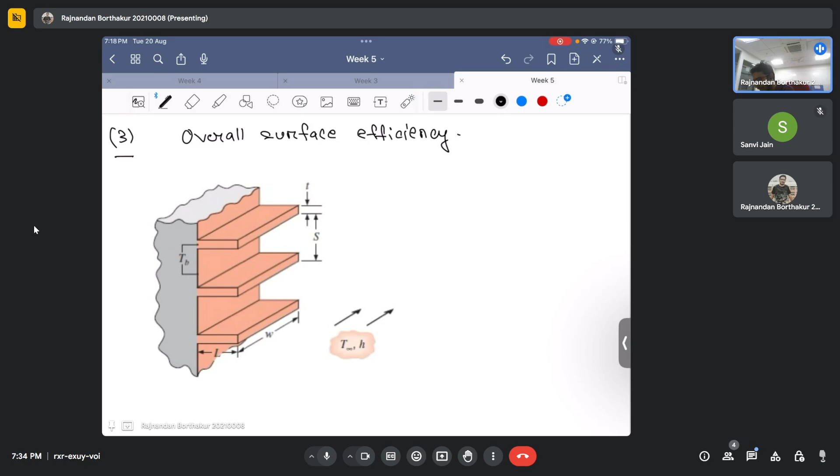Instead, they will use multiple fins stacked together. In all these practical applications where they use multiple fins stacked together, we define something known as overall surface efficiency, instead of defining just the efficiency of a single fin. So it becomes easier and customary to use overall efficiency instead of defining the efficiency of just one fin.

And I will show you how this overall efficiency is calculated. But before that, I'll stop here for 1 or 2 minutes. If you have any questions, you can ask, or else I will show you what this overall efficiency is and how to calculate it. And then, since this is a preponed class, we'll not extend it too much. We'll finish once we're done with this.

All right, so if you don't have any questions, we will basically see what we mean by this overall surface efficiency.

So as I was telling you, instead of just defining efficiency for a single fin, in most practical applications, for instance in bike engines or car engines, or any heat transfer devices where they use fins to enhance heat transfer, people do not use just one fin. Rather, what they do is stack fins together. This is done such that the rate of heat transfer increases much more.

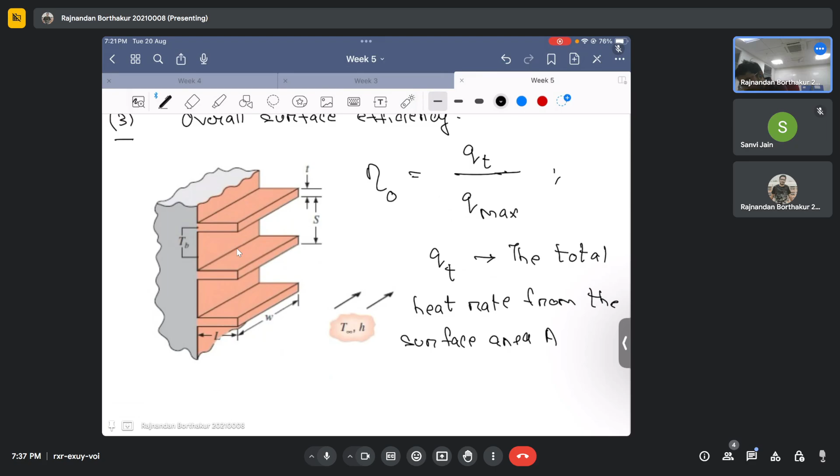Where this QT, as I wrote here, is basically the total heat rate from the surface area AT. This AT, the surface area we are considering, consists of both the fin areas and the exposed portion. I hope I'm making sense with what I'm trying to say.

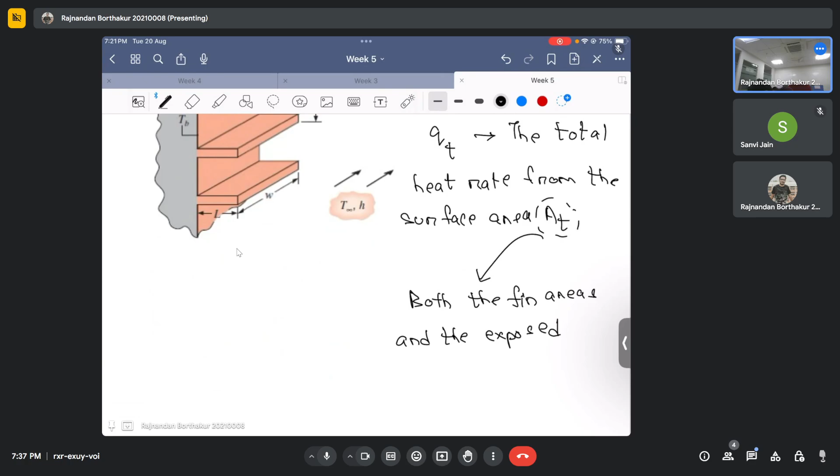So what this QT essentially means is it is the total heat rate from the surface area AT, where this AT comprises the exposed portion plus the fin portion. It's the total surface area responsible for transferring the heat. It consists of the exposed portion, which bears a temperature of TB, and the fin areas also.

This culminated area is termed the total area, and the heat transfer associated from this total area we will call QT. Similarly, this Q max is the maximum heat transfer that can take place from this total area, just like the one we calculated for a single fin. So this Q max would mathematically equal H times AT times theta B, because this makes sense, right? As I said, for a single fin this becomes H times area of the fin times theta B.

Now we are trying to establish the maximum heat transfer from the total area, and that's why it becomes H times AT times theta B. But remember, this AT that we are writing here consists of both the fin areas and the exposed areas.

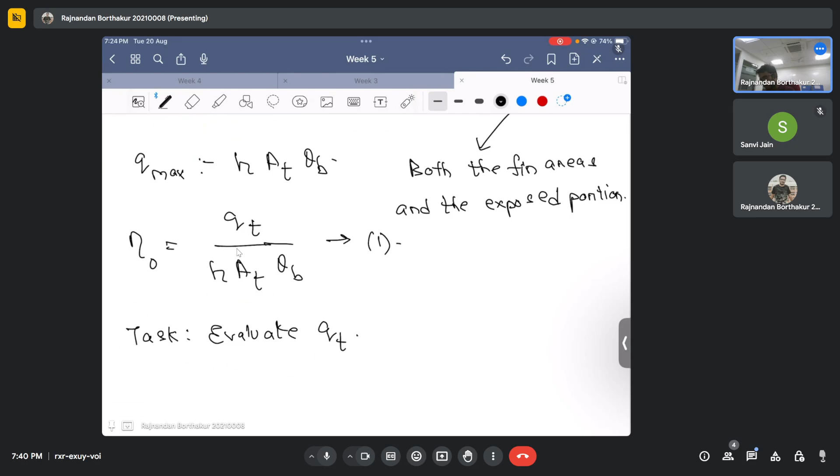By the way, if I tell you that I have n fins here — so here I'm showing 3, but in general I can say I have n number of fins — and the area of each fin is AF, and the exposed area, that is this and this, I'll write as AB. If this is given to you, can you tell me what is AT? Just think about it. If I have n number of fins, each of area AF, and the exposed area is AB, can you tell me what is AT? Remember, AT is the total area which encompasses the surface areas of all the fins plus the exposed area.

I repeat, this AB is basically all these exposed areas that do not have the fin attached to them. Can you tell me what is AT then from the geometry? It's simple, right? It becomes n times... yes, exactly. You kind of correctly said, but it won't be n times AF plus n times AB as you think.

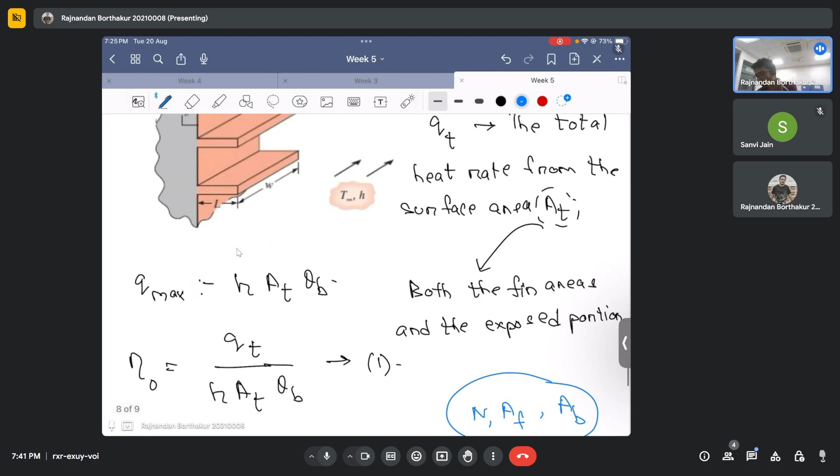It would be n times AF plus AB, because your thinking is correct, but maybe when I was explaining I wasn't clear. The fact is that I'm telling AB to be all these areas and not just one area — this area, and all these areas, for instance 1, 2, 3, and 4. All these areas would contribute to your base area, and that is why it will be n times AF plus AB.

So are you clear, Sanvi, why it is not n times AB and just AB? Okay, yes. All right, thank you. So this means we have simplified one more step, that I have now figured out what is my total area.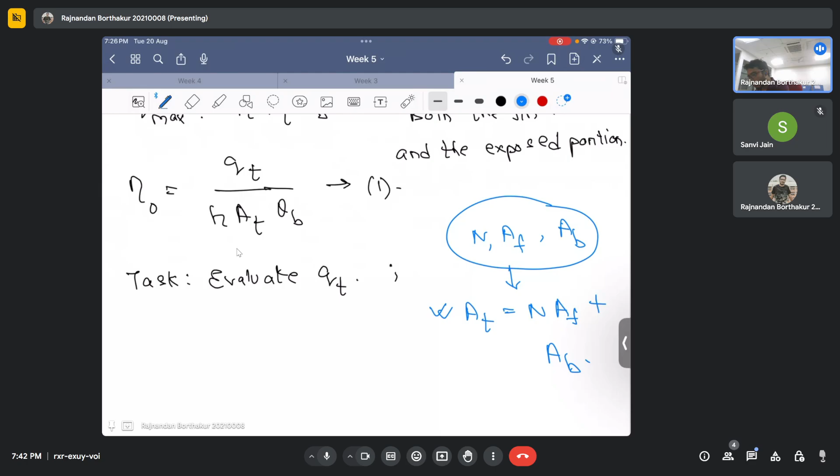So if I have figured out what is my total area, can you now tell me what is this QT? As I have said, this QT is the total rate of heat transfer from this total area, which means this QT will have the rate of heat transfer

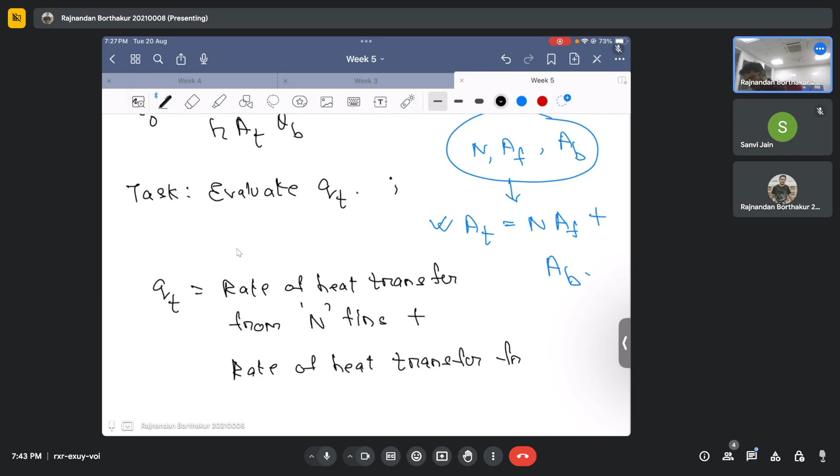from n fins. If you have 3 fins, this would be three number of fins. If you have 4 fins, it would be 4 fins. In general, if you have n fins, it would be n fins. Plus, since it's the total area, it will also take care of the rate of heat transfer from the exposed area.

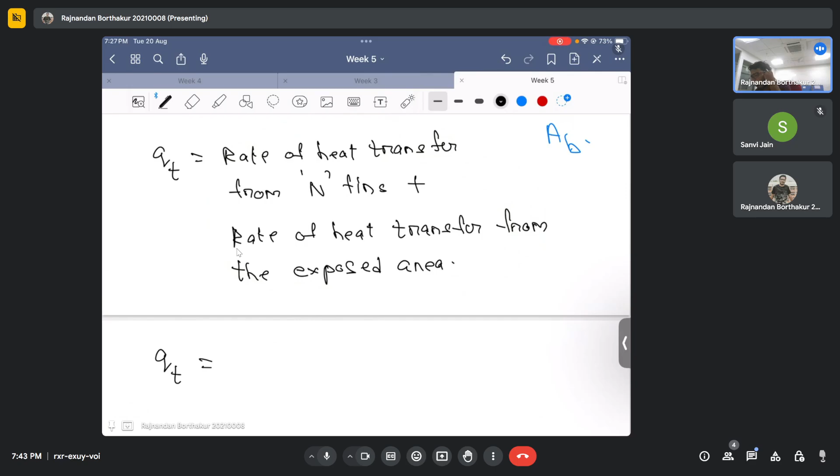So then, can you tell me mathematically what will be QT? This is something that I wrote, so you just need to translate what I wrote here mathematically. Can you tell me? This is easy, right? Because if I want to write the rate of heat transfer from n fins, I can write this as the efficiency of a single fin.

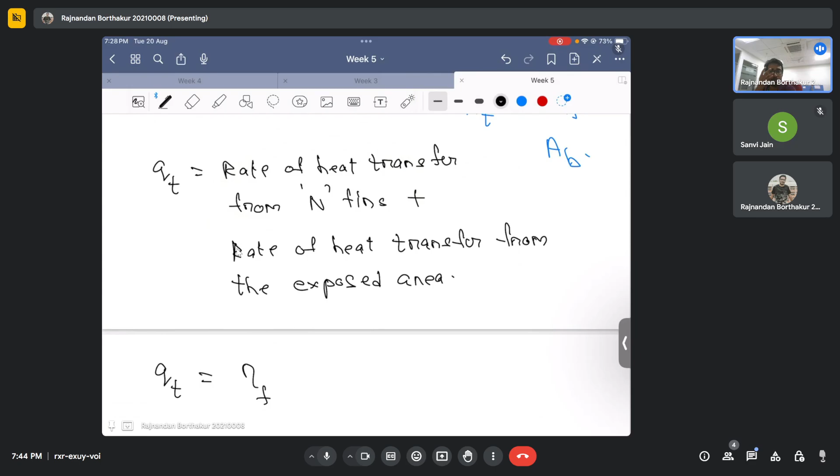I will write it as eta f times the maximum rate of heat transfer from n fins, because this comes from the definition of efficiency of individual fins. So I can write the rate of heat transfer from n fins as the efficiency of a single fin multiplied by the maximum rate of heat transfer that would take place from these fins. The maximum rate of heat transfer, recall, takes place when the entire fin is at the base temperature, which means it would be eta f times n, the number of fins, times h times area of fin

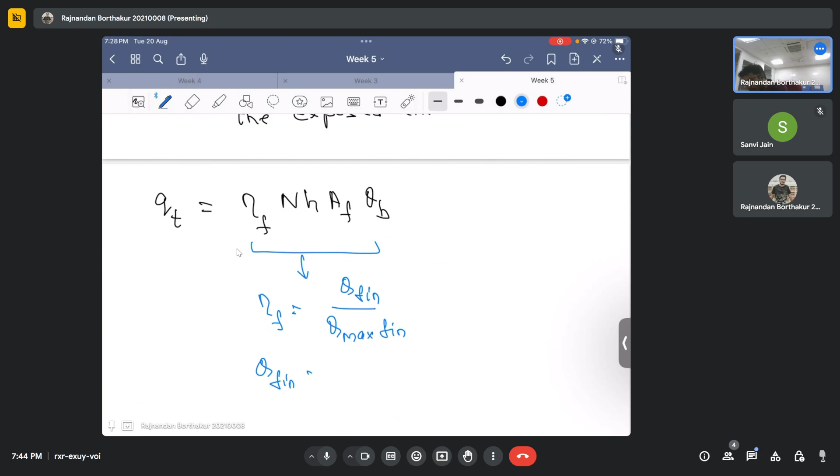times theta b. This is equal to the rate of heat transfer from n fins. I repeat, why is that the case? Because I can write the efficiency of a single fin as q fin by q max fin, and then I can write that q fin is equal to eta times q max fin, and this is for one fin. And this term that you see here, eta times this term, this is basically nothing but the term that I have written here. And since there are n fins, I am just multiplying with n.

I hope this is clear. We are going very slow, but I hope this is clear, why we have written eta f times n, h multiplied by af into theta b. This is for the fin part, right?

We also need to consider the rate of heat transfer from the exposed area. The rate of heat transfer from the exposed area is easy, right? It is basically the heat transfer coefficient times the area of the exposed area AB multiplied by theta B. So this is basically your total heat transfer that would take place from the area AT.

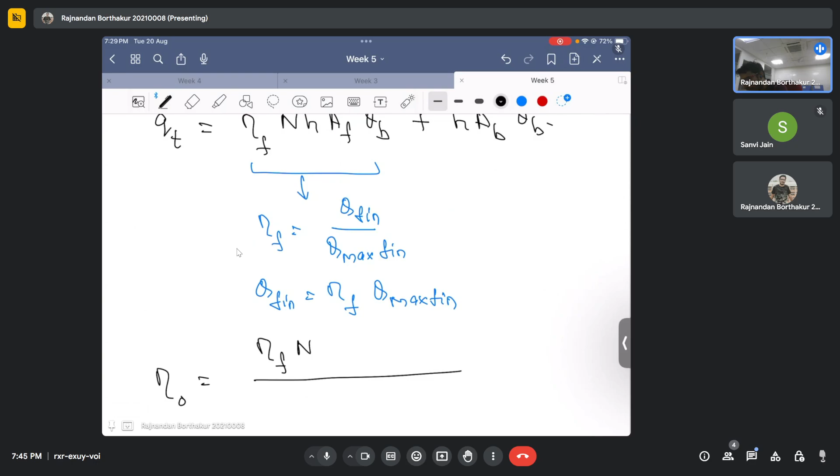I hope this is clear, so we are good to go. What we need is to substitute this QT into this expression of eta naught to get the overall surface efficiency. So eta naught is basically now written as eta f times n, which signifies the number of fins, multiplied by the heat transfer coefficient times af times theta b plus h times ab times theta b, divided by the maximum heat transfer, which was h at theta b,

which means I will have what? I will have theta b's being cancelled, and h also will be cancelled, which means I can write this eta naught, the overall efficiency of a stack of fins, as eta naught is basically eta f times n af plus ab, divided by at. I hope this is clear.

Now I can do one simple simplification. What I can do is, can you tell me, can I write this AB as the total area minus n times AF? Can I do this? Can you give me a yes or a no? Can I write the exposed area as the total area minus the fin area? Yes, right? Of course I can do that.

This means that your eta naught can be written as eta f times n into AF plus, this is AT minus N times AF, divided by AT. If you simplify this, you'll end up getting a very nice expression which comes out as 1 minus N times AF

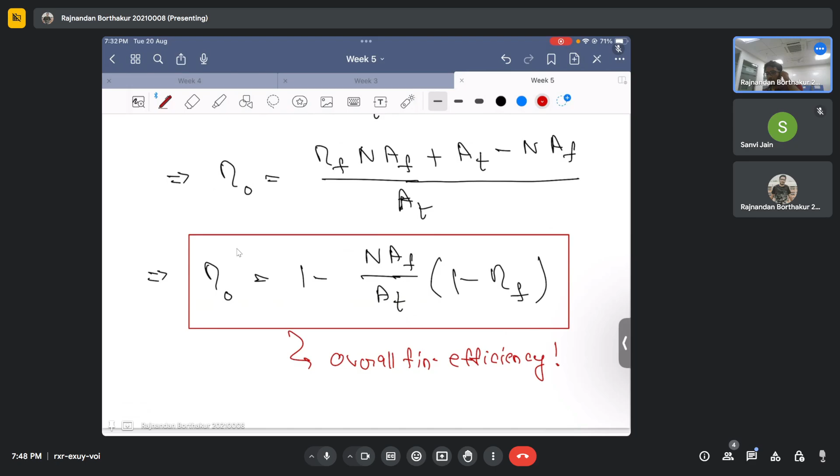Okay, I hope this is clear. I want you to be clear from this step, how did I write the rate of heat transfer from n fins as the efficiency times the maximum rate of heat transfer from an individual fin, multiplied by the number of fins. So are you clear? Can you give me a yes or no? Because this step is important. The rest is straightforward, but did you understand why I wrote this?

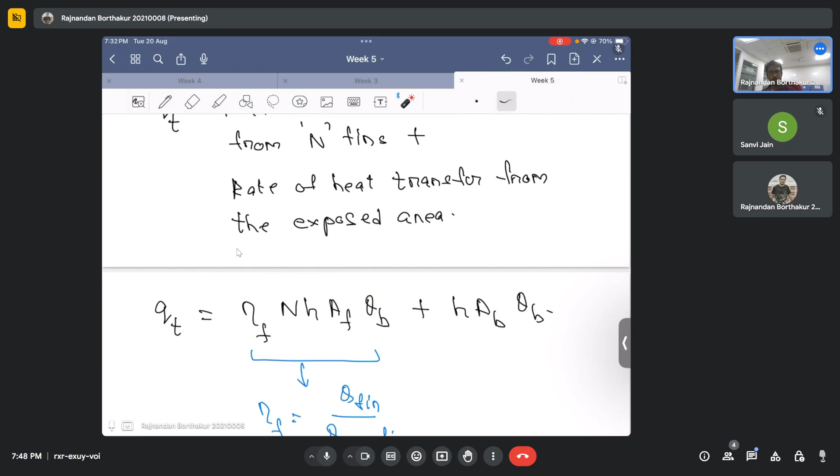Yes, okay, very nice. So the goal was, if you remember, the objective was to analyze a stack of fins instead of just analyzing one fin. So now, what did we gain from this exercise?

The thing is, these areas are known to us. If I pick a single fin, I know its area, so AF is known, and the number of fins we can decide. AT also we can evaluate on our own because we have seen that AT is nothing but N times AF plus AB.

This means that if I know the efficiency of a single fin, I can calculate the overall efficiency if I now use multiple fins. In a way, this will enable us to calculate the overall heat transfer that will basically take place from the surface from which we are trying to dissipate the heat.

So this enables us to study a system of fins that are stacked together in terms of the efficiency of a single fin. So by this you understand, right?

By this, I don't need to individually do the analysis for each of the fins. Rather, what we will do is pick one fin, do the analysis for it, calculate the efficiency of one fin, and then multiply it with the number of fins that we have, using this relation to get the overall surface efficiency for the fin structure. That's why we use this term, known as the overall surface efficiency.

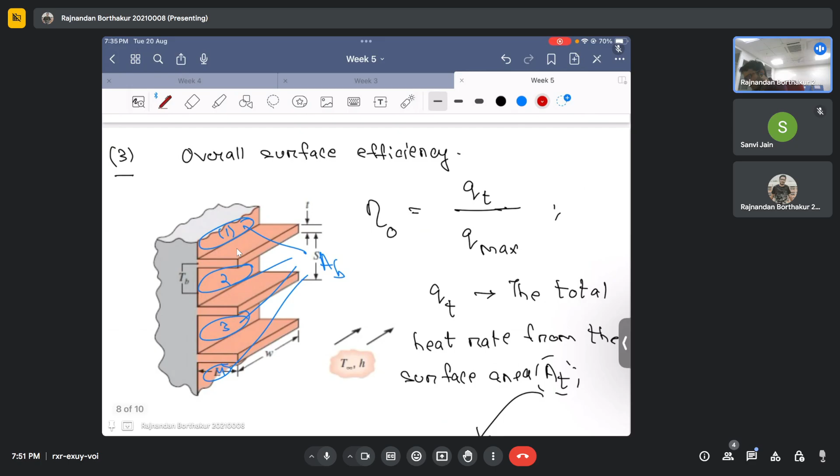If I don't use these three fins together and instead use a single solid fin, like maybe this, meaning that this is now filled...

Then you can establish that the rate of heat transfer from this solid fin would be much less than from this fin structure using individual fins with air gaps in between them. The sole reason is that the perimeter to surface area ratio increases, which means we can enhance the rate of heat transfer for the same surface area from which it is trying to dissipate heat.

This is typically the reason why people use multiple fins rather than a single fin. I hope this is clear, and this is something I wanted to discuss today. I think now you'll be in a good position to answer the questions from the assignment. I would suggest going through the lecture series once, and then you can do all the questions of assignment 5.

This is something I wish to discuss today. There is one numerical, but we will not do this numerical today. Maybe in the next class we will go through this numerical.